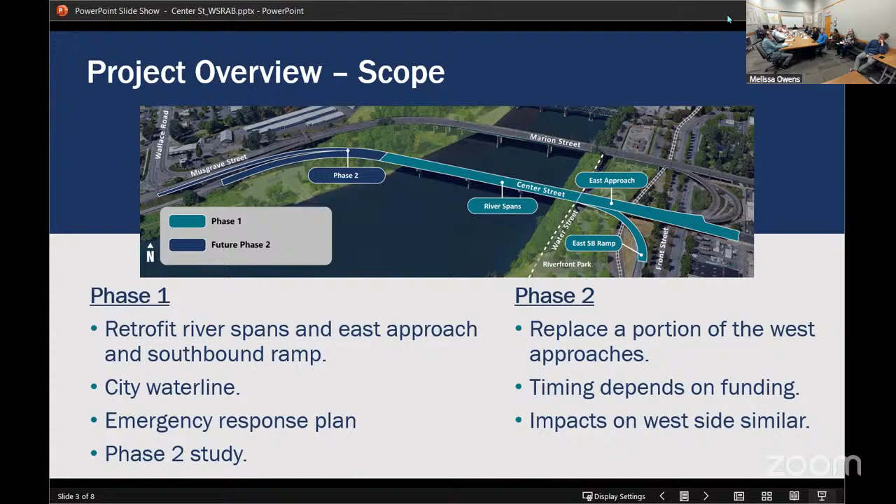As I mentioned, phase two is in that liquefiable soil that's really difficult to retrofit. This transition between phase one and phase two actually occurs on that west bank, and the solution there is to essentially replace the foundation that connects those two. There's a bent there — it'll be 2 new drilled shafts, and then we'll demo the existing foundation. We'll transfer the current bridge onto those 2 new drilled shafts, and then demo the existing foundation.

It's going to be similar to Abernathy. I'm not sure how many people here are familiar with that project, but Abernathy has taken a similar approach to their retrofit solutions — they've done new drilled shafts. These drilled shafts will be a little smaller than Abernathy's, but similar in scope to what it'll look like. We're calling it a super bent instead, creating a bent outside of the existing foundation and then connecting the bridge back into it.

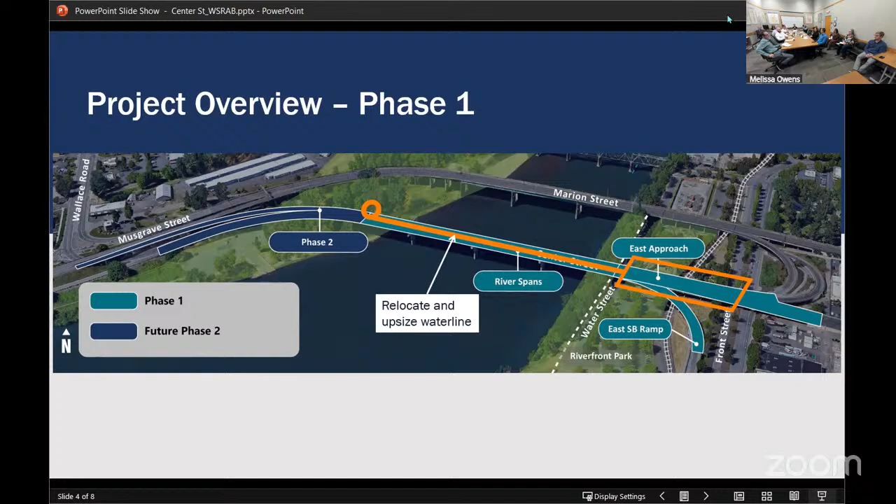As I mentioned before, the water line—one thing to note is that the water line on the bridge is all within phase one. So when we're done with phase one, at least the water line within the bridge section will be seismically resilient. That's one side that isn't being affected by this phasing.

With that, we would expect construction to be completed sometime in 2029. So it's a three to four year construction project. If we get it started early next year, that's what we expect.

So, Andrew, you mentioned acquisitions—are there any acquisitions as part of the scope of the project? That's a good question. Acquisitions are mostly temporary easements, so nothing where we'd actually be taking property, but we would be using property, and most of it's within city property. We'd be working mostly within the parks, with a couple of private properties we're looking at, for temporary access. No permit needed. Thank you.

Hi, Ernesto. Well, there's one from the city that's an easement. For the new drill shafts, there's a permanent easement on them with the city, but nothing significant.

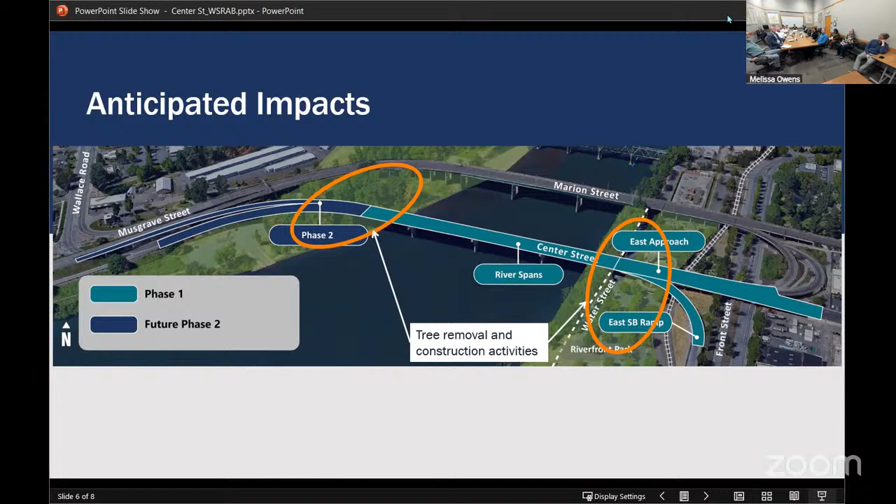It's a disease that's wiping out trees throughout Oregon, so we'd be replacing the ones that are there with a native species that's more resilient. Some of the trees within the parking lot are already struggling because the soil wells they're in are too small for the species that's there. So we're working with the city to pick out better species suited for that parking lot, and expand those soil wells so those trees can be healthy in the future. The trees we're replanting will be better in the future.

The more extensive impact is the lane closures. We're looking to close 2 of the 4 lanes for somewhere between 3 and 4 months at a time, which will create additional traffic. We have plans to accommodate emergency services during both of these traffic impacts. We've tried to reduce the lane closures as much as possible, but there's no way around working on the bridge while traffic is active—there's no space to do otherwise. For perspective, we'll be working on this bridge for 3 to 4 years, but only reducing lanes for 3 to 4 months. We've worked as hard as we can to reduce that.

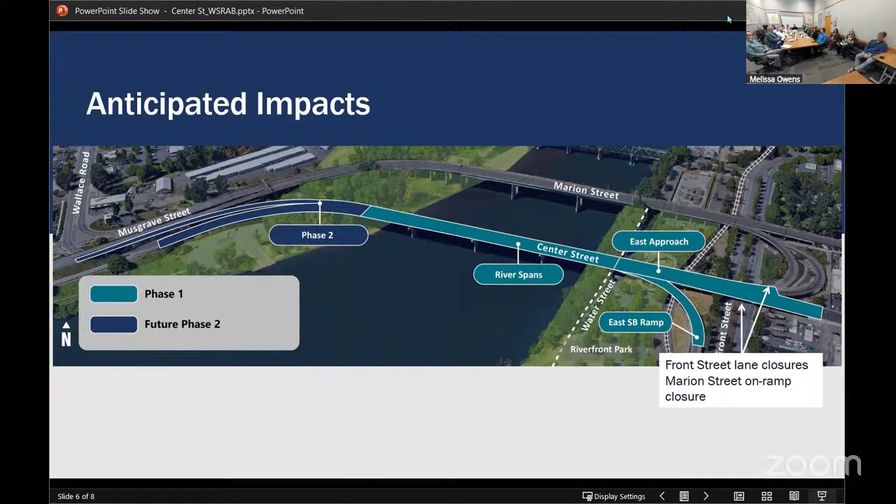And it conflicts with some of the foundations that are there, so we do some water line relocation work ahead of time so that we can work on those foundations.

One of the things the contractor is most likely going to want to get started on right away is the temporary structures associated with this project, like coffer dams and work bridges, because that's all in-water work and they want to get that done as quickly as possible since there's only certain times they can do that, so that'll be a critical path for them.

It's possible the contractor doesn't do that first, but that particular item I think is likely to happen in 2026. In 2027, you'd start to see some of the construction work on the east side, working on some of those foundations and strengthening the structures there.

And then they would start on some of the in-water work, working on the foundations that are in the water after they've done those temporary structures. In 2028, continuing that east side work, working on the Wallace side, and then the water line upgrades.

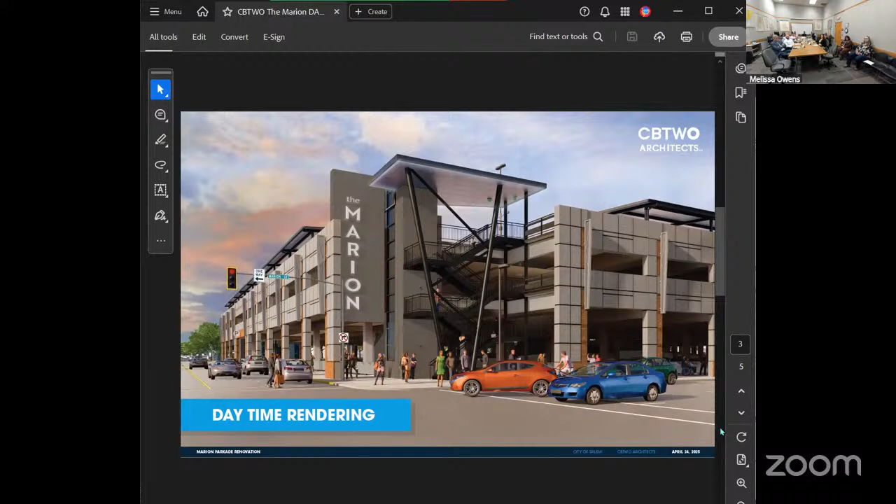So the other goal of this project is aesthetic improvements. We want this to be - as you're coming down Liberty or coming down Marion - this sticks out a little bit more than it does right now. It's just kind of a dead concrete and brick structure. So adding a little bit of interest to the corners, providing a bigger sign highlighting the Marion, and having lighting from the roof along the stairwells. The signage will be backlit and these fins will be lit as well, providing a more active feeling structure.

Yeah, so we think it'll look a lot nicer and more inviting at night.

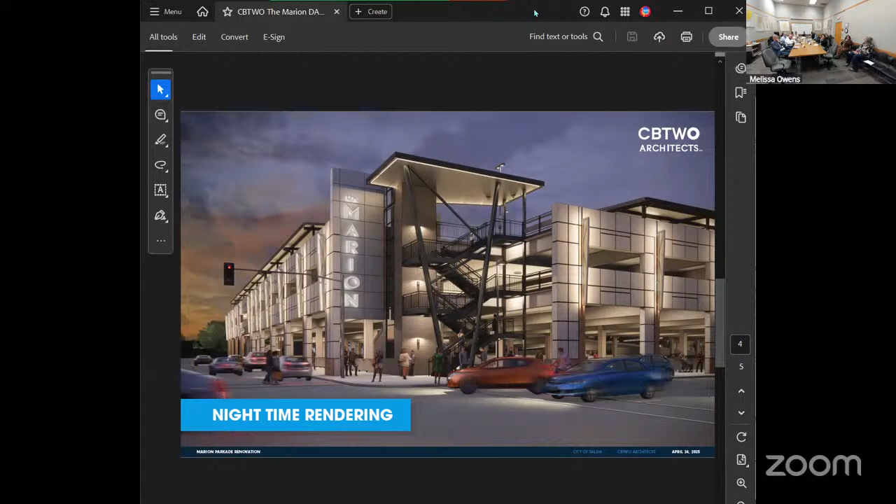That's paid parking, right? No. CCTI uses that a lot—we use it at the SPDC quite a bit, so that Union Street closure is interesting. This kind of aligns with the city's move towards surface parking being paid surface parking here in July. So this will be free, planning to continue to be free, making it a more inviting kind of space, because people will probably be moving towards the free parking.

Will that fleet pen cage thing still remain? Yes, big nod. We have no instruction to remove it.

What's the total cost of the project? Currently, we're projecting it out to be about 6 to 6.5 million.

Where's the funding coming from? Just part of the budget. That's really going through that one.

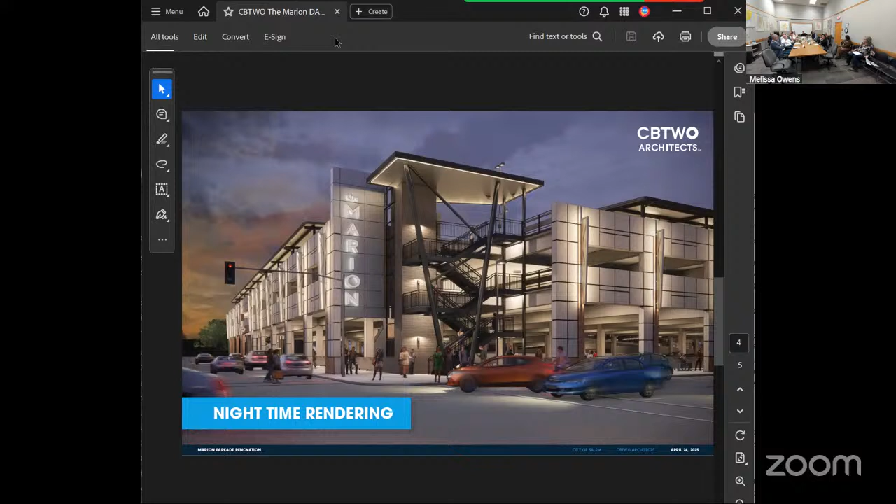You can take off or hang around for the paid parking update, but that moves us into our last information report for paid parking. There's 2 pages in our sheet here.

That'll be me, it'll be you. Okay, so this will be brief because we'll have Sarah at the next meeting to go into more detail. It was just giving you, with everything moving forward, each meeting we'll let you know what the status is because we're ramping up in June and July.

The equipment is being shipped now. We're getting some next week. We'll make sure everything's running properly, and then we'll get the bulk of it later in June. Activity installing all that equipment, and it can go live in July.

The next several months will be a lot of activity, so we're doing what we can. The parking group has done an excellent job getting communication out there, so we'll send the information to you guys as soon as it goes out, so you can stay apprised in case anything gets brought up as you're going downtown.

What's the goal of the existing parking meters that the city has? Is the goal to shift everything to this infrastructure? And is that happening first or second? That will happen second, but it's gonna be within the same timeframe.